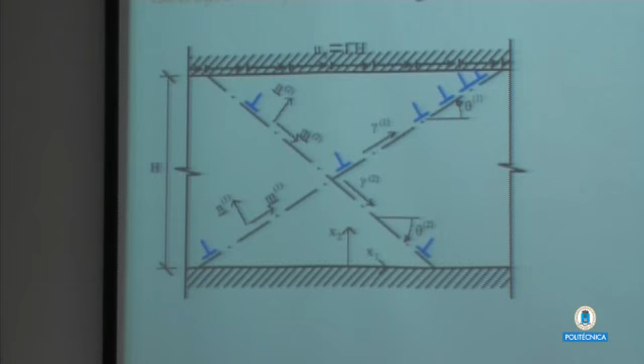Let's start with this benchmark. This is a strip, a single crystal strip. It is compressed between two bodies in which dislocation cannot penetrate, and it is subjected to simple shear.

Here I have put a couple of slip planes, and there are these blue edge dislocations. When you subject the strip to simple shear, these dislocations start moving on this slip plane, and they pile up on the border where they cannot penetrate.

The slip on each glide is gamma, in this two-dimensional case. So these dislocation lines are just piercing this plane.

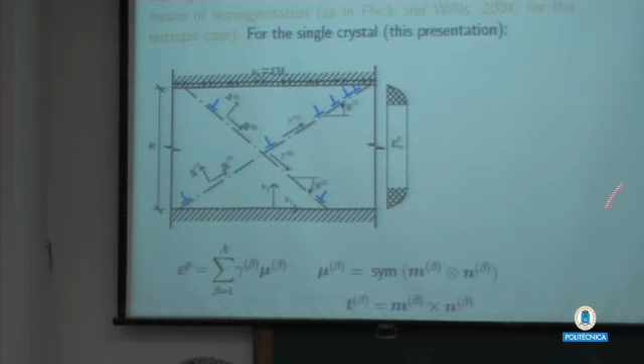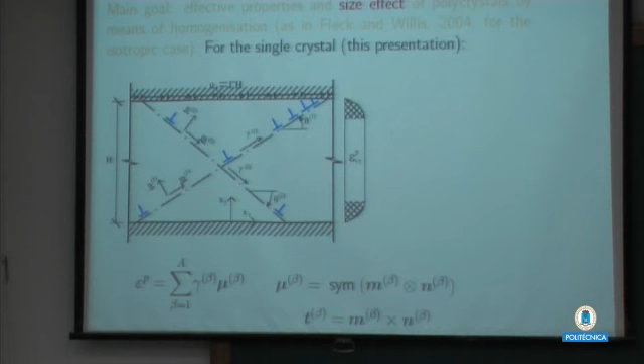Once you have the slip on each glide, you combine them in order to compute the plastic strain. The plastic strain is given as the sum of the slip times this Schmid tensor, which depends on the crystallographic details, the slip direction, and the normal to the slip plane.

Once you compute this plastic strain, you find something like this. The plastic strain has to be zero close to the boundary, because there the dislocations just stop.

The point is that if H is quite big, you don't care about this boundary layer of plastic strain, because it's negligible in comparison to the dimension of the strip.

So standard plasticity works, and you just predict homogeneous plastic strain. Instead, in the size dimension between a few hundred nanometers and a few tens of micrometers, this process zone counts a lot, with the usual 'smaller being stronger' effect.

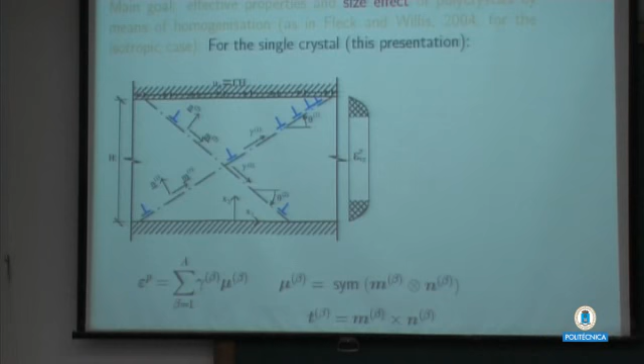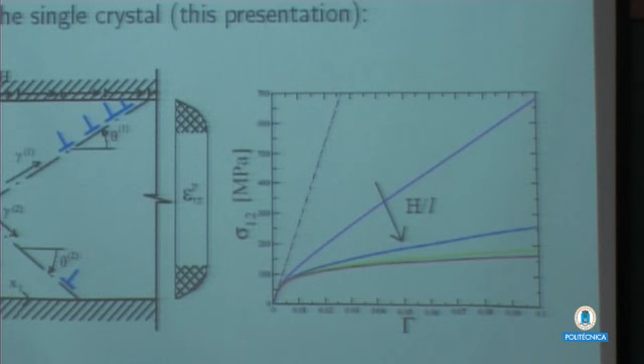This is too sensible. I wish to predict size effects like this one: if I plot the uniform shear stress on the strip against the applied strain, as I go down with this dimension, I see the strain hardening increase. This is one size effect, and it depends on the length scale, which is related to this process zone.

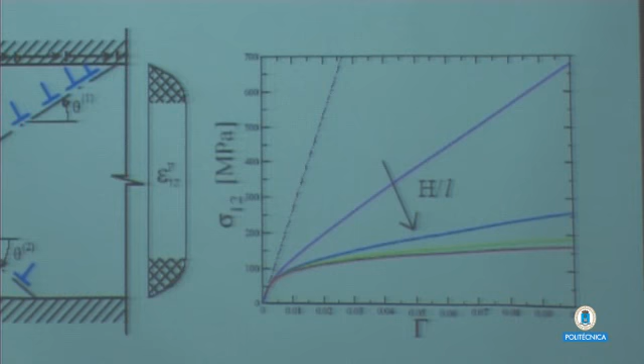So let's imagine we just go down with the dimension and we see this slope of the hardening curve increasing. Another typical size effect is the strengthening. This means it depends on a different mechanism, and when you decrease the size, you see the yield stress increase, with little change in the slope of the stress-strain curve after the yield stress.

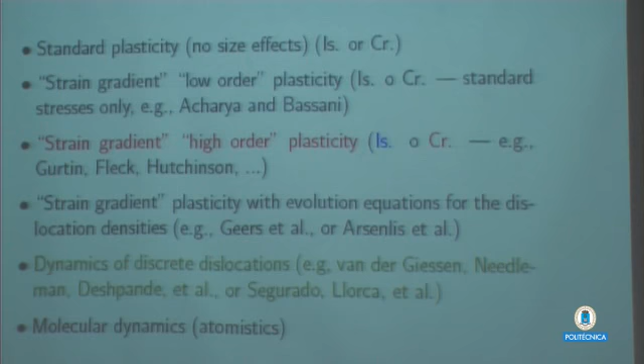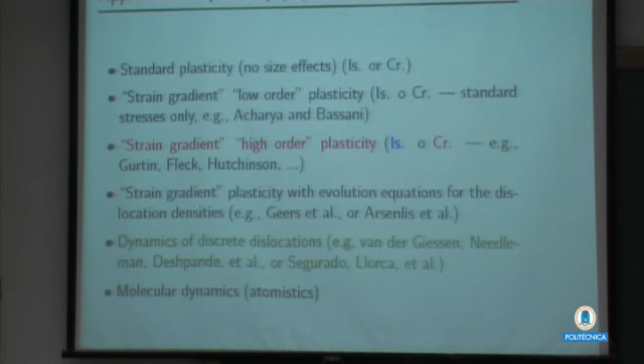More or less, these are some approaches to plasticity. Standard plasticity is not able to reproduce any size effect. Of course, there are no length scales involved in the model, whether isotropic or crystal plasticity.

The first easy approach to try to describe some size effect is the so-called lower-order plasticity. This can also be isotropic or crystal plasticity, but you just put in a rather rude way some dependence on the gradient of the plastic strain, just in the tangential modulus, in order to predict some size effect. There are no higher order stresses or higher order boundary conditions.

Instead, my talk is about higher order strain gradient plasticity. This can be crystal or isotropic. Here we have non-standard boundary conditions, non-standard stresses, and so on. And the basis for this theory...

has been given by well-known scientists, Gurtin, Fleck, Hutchinson, and so on. Then an even more detailed description is strain gradient plasticity, in which you also have an evolution equation for the dislocation densities, which is not the case in the theory I'm talking about. Then there's discrete dislocation dynamics, a much more detailed description, where you abandon the continuum description—this is discrete—and for even more detail you can go to the atomistic level.

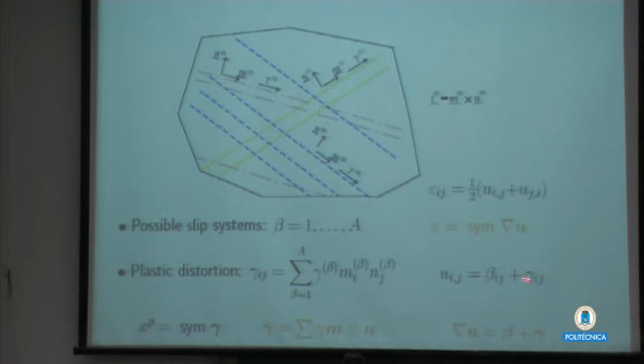Let's go back a little bit to the notation. In this light brown, I copy the equation in symbolic notation instead of index notation. The strain, the total strain, is as usual the symmetric part of the displacement gradient, and this displacement gradient is divided into an elastic part beta and a plastic part, the plastic distortion, obtained by combining the glide, the slip on each system...

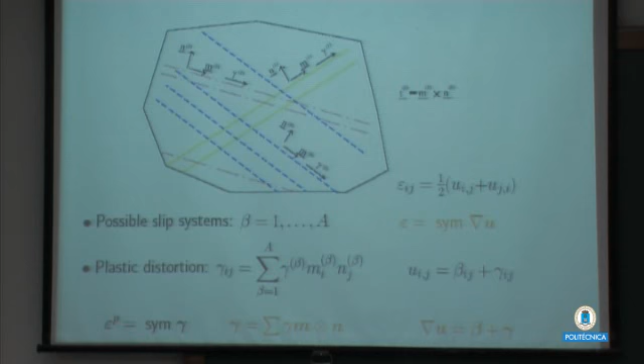with this crystallographic unit tensor. And if you take the symmetric part of the plastic distortion, you have the plastic strain, and this becomes the Schmid symmetric tensor.

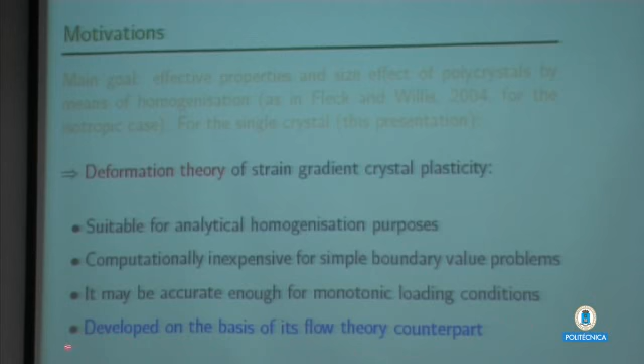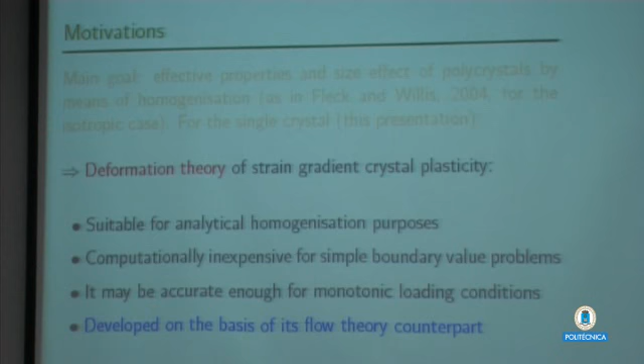I talk about the deformation theory of crystal plasticity, not flow theory, because when I started this work, as I said earlier, my goal was an analytical homogenization, so there was no way to do it with flow theory. Also, deformation theory is quite a mess, but anyway, the first approach was deformation theory because it's much easier to deal with. The most important thing is that this deformation theory is developed on the basis of flow theory, so we always have a parallel with flow theory that we can develop together with the deformation theory.

Before talking about the strain gradient extension, I'd like to say something about the classical deformation theory of crystal plasticity—so no size effect involved, just classical stuff.

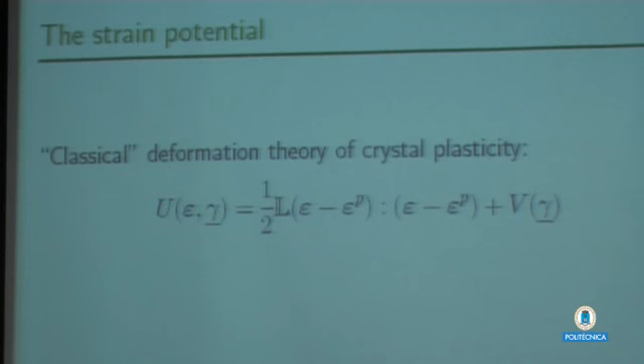You start by defining the strain potential, and in the strain potential there is the linear elastic energy, plus a plastic potential, which is a function of the slip vector, a vector that collects all the available slip systems.

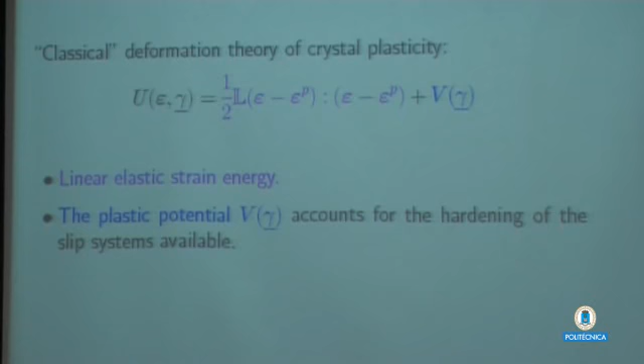The strange thing with respect to what we are usually accustomed to is that we define two independent kinematic variables, but independent just because of the stress conjugation, not because they are physically independent. So we associate a stress, the usual Cauchy stress, to the total strain, and we also associate a new stress to each plastic slip.

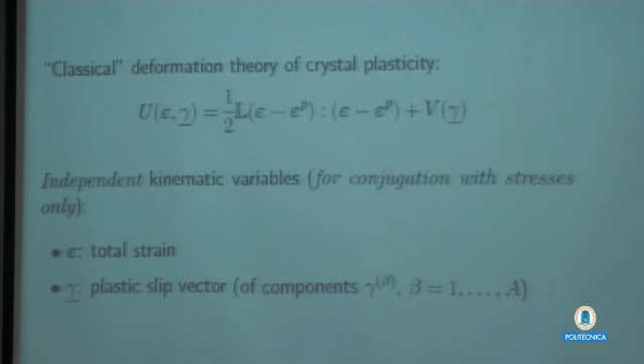This new stress S, with an S for each glide, is conjugated to the plastic slip on that glide, and it turns out to be the difference between this stress H, which is a function of the slip in the model, and tau, which is the resolved stress on the slip system you are considering—so it's the Schmid stress.

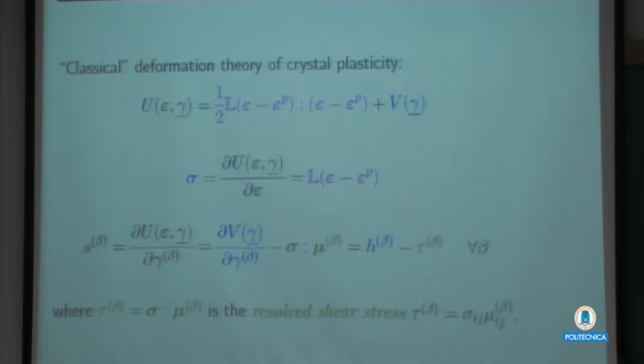Once you put this into the total potential energy, you just look for the minimum, so you write down the stationarity conditions, and what you obtain is the usual divergence of the Cauchy stress equals zero if you don't have body forces.

But you have another equilibrium equation, which is this one: this new stress we have defined is just zero. This means, since it's an equilibrium equation, that we have this equality, which is the usual flow rule—the Schmid, the resolved shear stress, must be equal to some function of the plasticity you have.

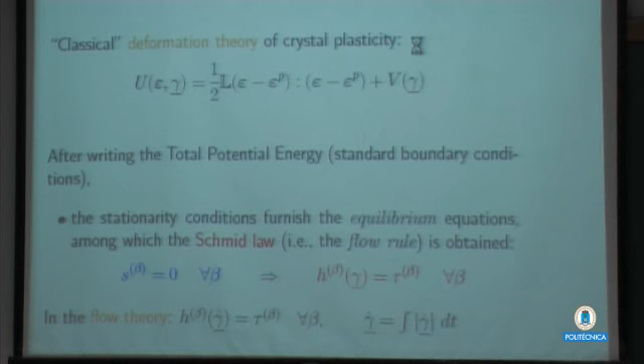In the flow theory case, the definition of this stress is a little different, because it's not in terms of the actual plastic slips, but usually the accumulated plasticity. But the field equations are exactly the same in flow theory or deformation theory if written in terms of stresses—it's just a matter of defining the stresses.

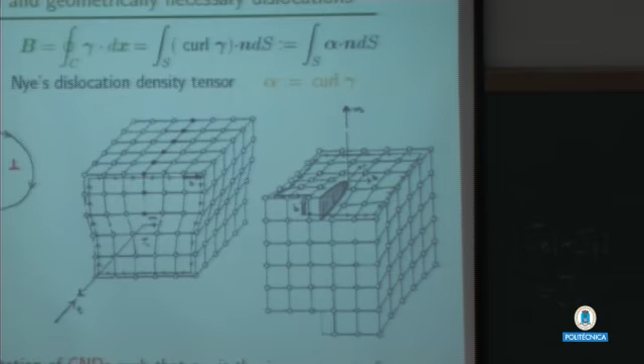Now let's go to the strain gradient extension. First, I'd like to introduce the most important kinematic variable in order to extend the model to the strain gradient case, which is the Nye tensor.

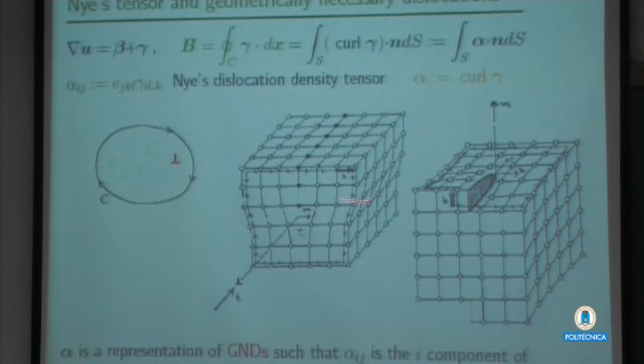What you try to do is copy what dislocations do in a real crystal. So here you have an edge dislocation and a screw dislocation, and this is the usual procedure in order to obtain the Burgers vector due to this dislocation.

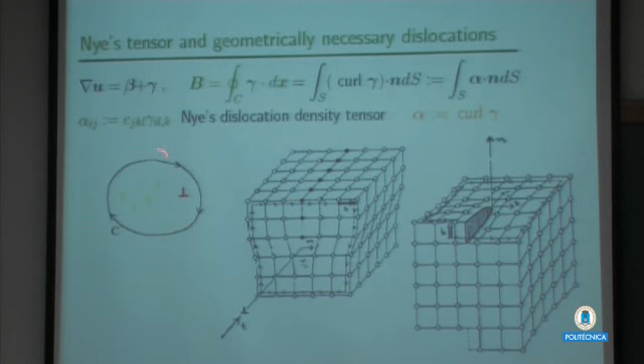If you divide the gradient of the displacement into the elastic and plastic part, you know that the plastic distortion, usually, if you integrate it in a closed line, it doesn't give zero because it's not compatible in general, but it gives a net Burgers vector.

In this picture we have a few edge dislocations, and if you do this operation, all the dislocations with a different sign just compensate, and finally in the Burgers vector you have only the surplus of dislocations of the same sign, so in this case only the red one, and these are the so-called geometrically necessary dislocations.

So then if you apply the Stokes theorem, you pass to the surface integral, and you define the curl of the plastic distortion as the Nye tensor.

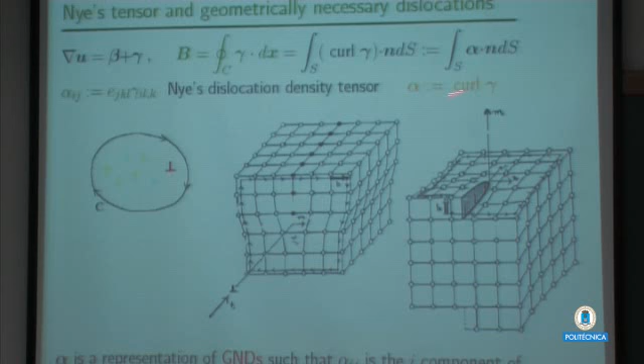The first index in the Nye tensor is related to the net Burgers vector. The second index, this is a second order tensor, is related to the dislocation line direction. You compute this net Burgers vector in this way.

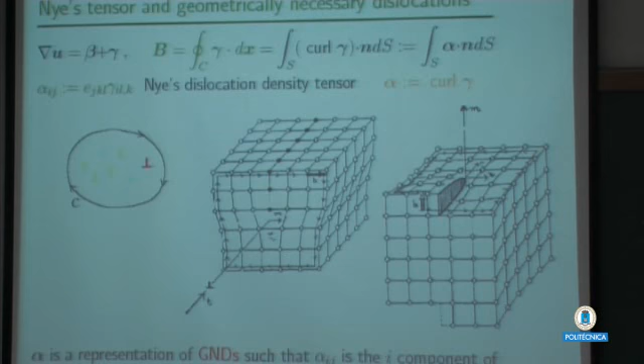So the Nye dislocation density tensor is a representation of GNDs. As I said, the first index is related to the Burgers vector, the second one is related to the direction of the dislocations you are accounting for in doing this integral on the surface S.

We'll skip all these mathematical details, but what I'd like to say is that if you take this definition of the Nye tensor and substitute the definition of plastic distortion, you can write the Nye tensor in terms of slip gradients and some crystallographic details.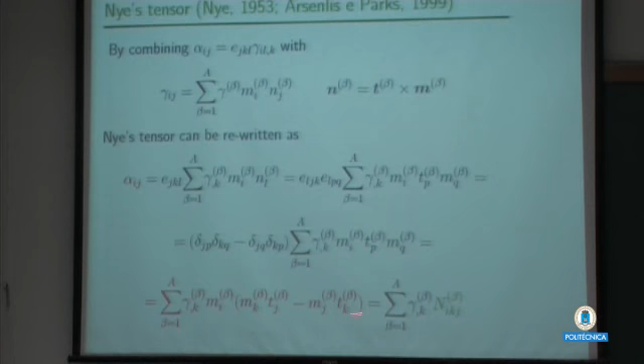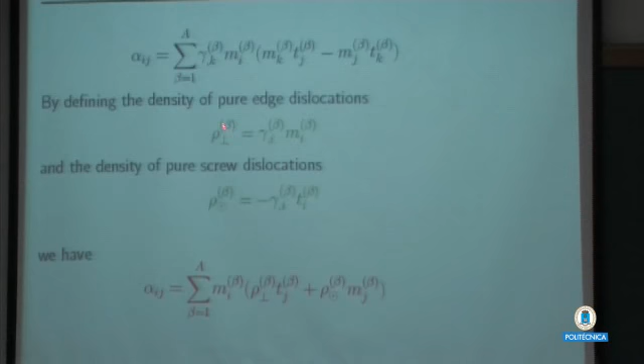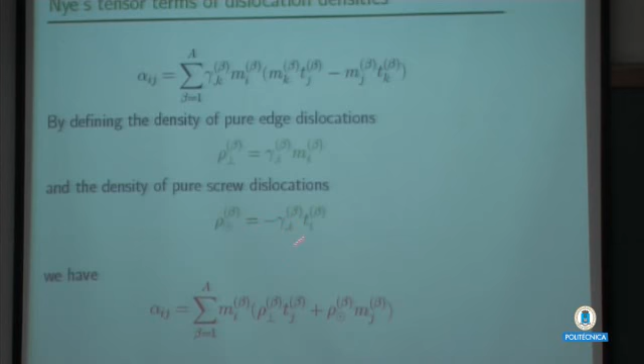These are all the unit vectors that define the crystallography you are considering. The main thing, why we do this, is because we can recognize that the component of the slip gradient on the slip direction is a pure edge dislocation, whereas the component of the slip gradient on the transverse direction in the slip plane is a pure screw dislocation.

Why is this? Let's see. If we consider an edge dislocation, look at the first term of this expression for the Nye tensor. The edge dislocation has a gradient along the slip direction, M. The gradient has to be projected onto this direction, and the Burgers vector is directed as M, as usual. The edge dislocation line is exactly T. So this first term is a kind of representation of a pure edge dislocation.

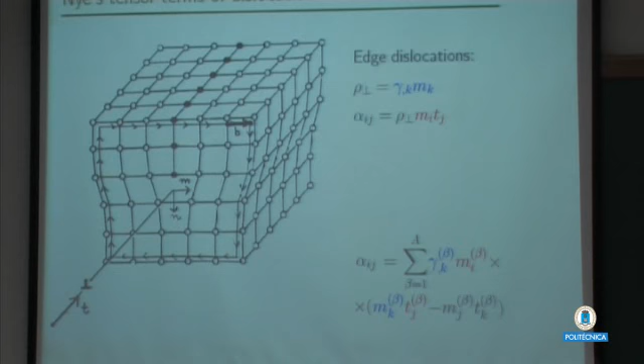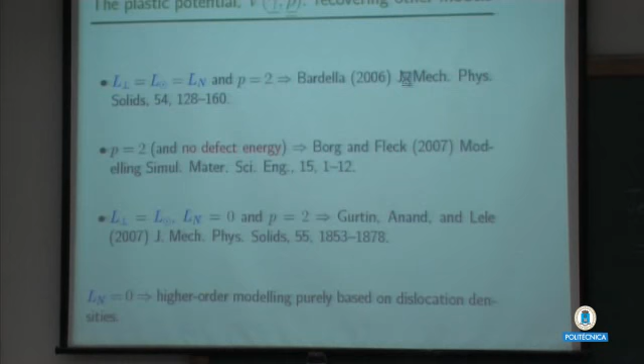The same happens with screw dislocation. In the case of screw dislocation, both the dislocation line and the Burgers vector are directed as M, and the gradient is in the transverse direction.

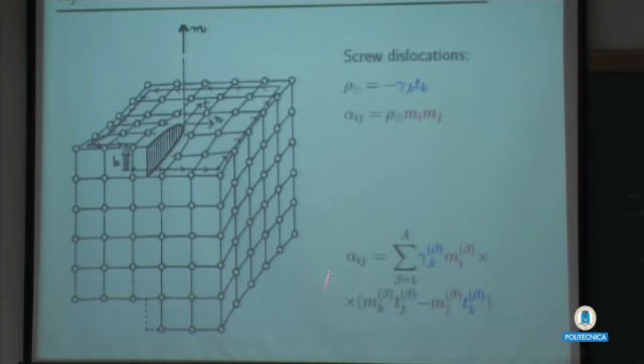So we want to use this Nye tensor in order to extend the model that we have seen earlier. So we take the strain potential and we add a function of the Nye tensor, and we also add something else. We'll see in a second what this is.

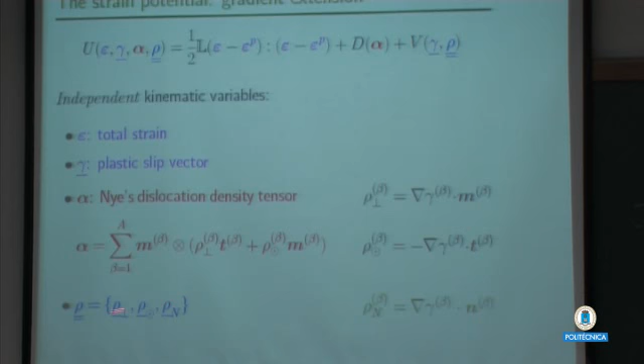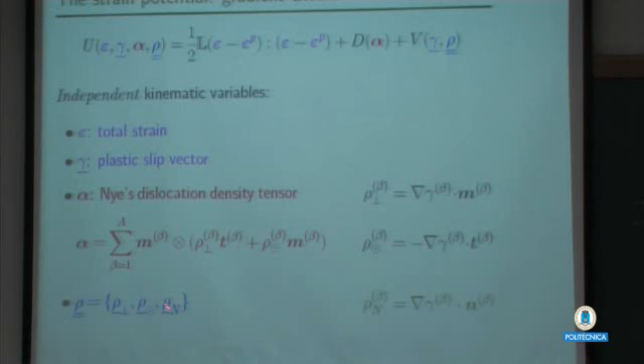So we have the usual standard variables to which we want to conjugate some stresses. We have the Nye dislocation density tensor, and we have this matrix in which we collect all the components of the slip gradient. The first two are dislocation densities, as we have seen. The third one is just an extension of notation, the projection of the slip gradient on the normal to the slip plane. We just want to see how these affect the behavior.

So what is this function? D of alpha is the defect energy. It has been defined earlier by Gurtin, and this is an energetic term. So if you write the flow theory, this is an addition to the free energy, and in the flow theory we still have here the total value of the Nye tensor.

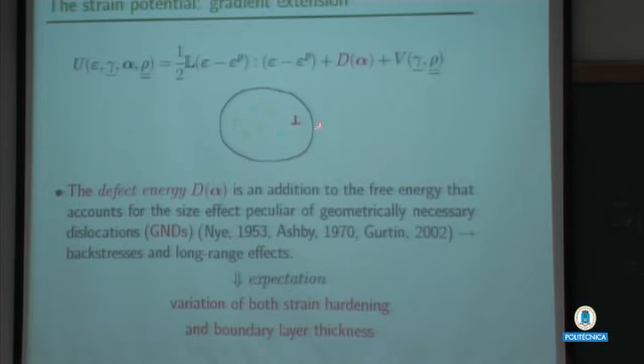What's this for? If you recall this picture, with the defect energy you try to account for the singularity in the Cauchy stress due to the dislocations in your material. This is an energetic term, and since you account only for GNDs, geometrically necessary dislocations, this means that if you are judging the effects of these dislocations, you see only the effect of the red dislocation. The other ones just compensate.

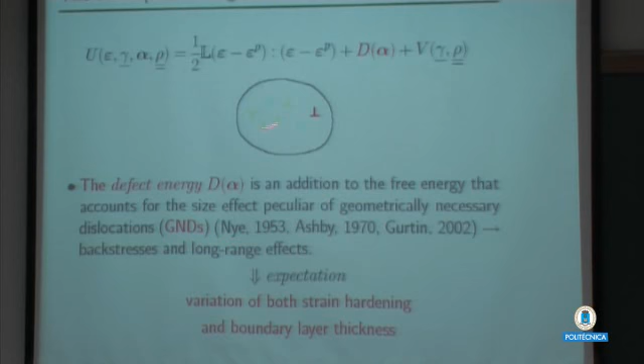This is related to long-range effects. The back stress should be energetic, something like that.

This other term instead tries to account for the dissipation due to dislocation motions, so the whole population of dislocations, and this is completely phenomenological. I wrote dots here because I remember that this part in the flow theory is a dissipative part, so the stresses come from some plastic potential, if you like.

It's better perhaps in the flow theory to call it some hardening function in which the main variables are rate of plastic measures, not total plastic measures. And the expectation is that this could model the strengthening.

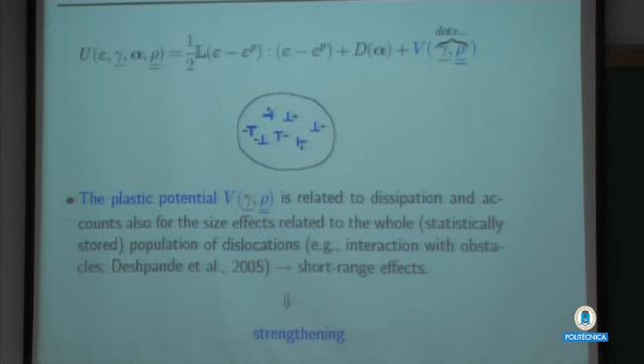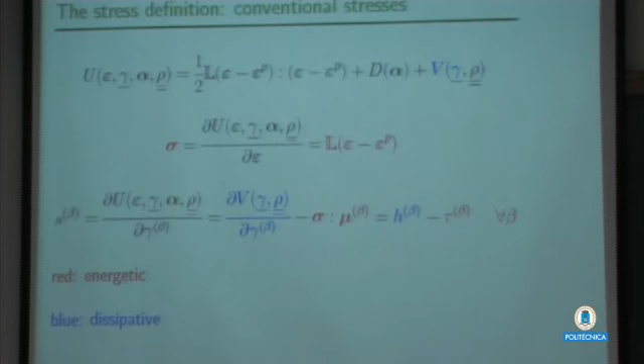So after you have extended the classical theory in this way, you just run the usual technology. You define for each of these independent kinematic variables the stresses. There are the usual two stresses we have seen earlier for the classical theory.

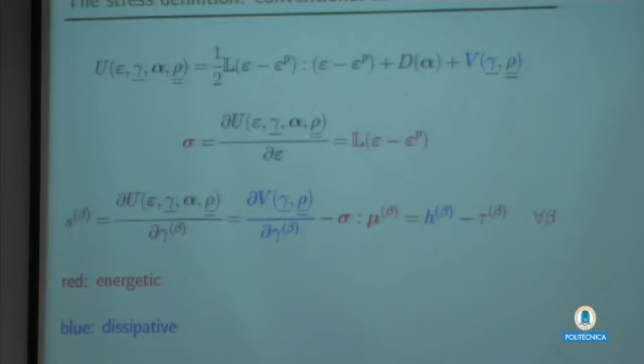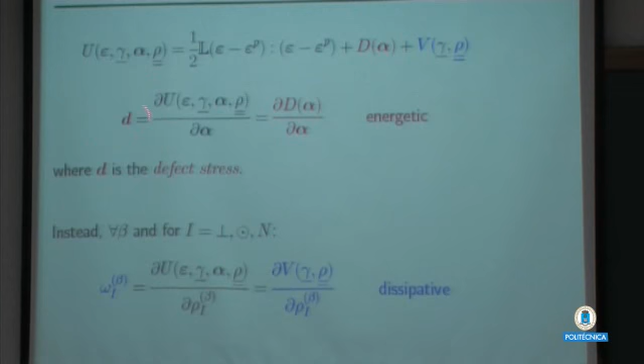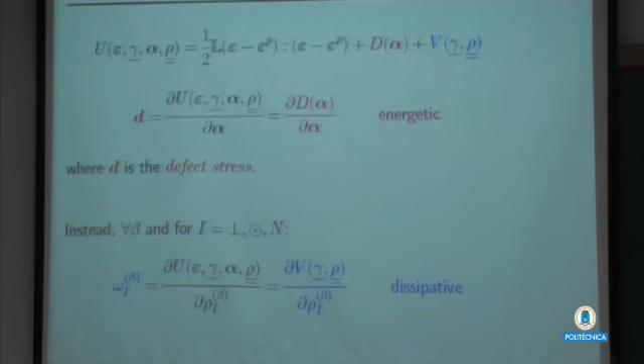And you define also the defect stress, which is dependent on the defect energy, and this has been defined. The transpose of this stress is what Gurtin called the defect stress. And then there are these dissipative stresses, conjugated to all these projections of the plastic slip gradients.

Another non-standard stress that is useful to define is the microstress. In order to define the microstress, you conjugate this stress to the gradient of the plastic slip, in which you also consider the dependence of alpha and rho on the plastic slip. This is useful because it's a combination of the defect stress and the dissipative stresses, and because it comes out in the higher order boundary condition.

So beside the standard boundary conditions, you have these non-standard boundary conditions. You can do something more general, but from the physical viewpoint, we just consider that when this dislocation cannot penetrate the boundary, you set that the plastic slip must be 0. When instead you know that this dislocation can leave the body and make a step, you say that the microstress, this higher order traction due to the microstress, is 0.

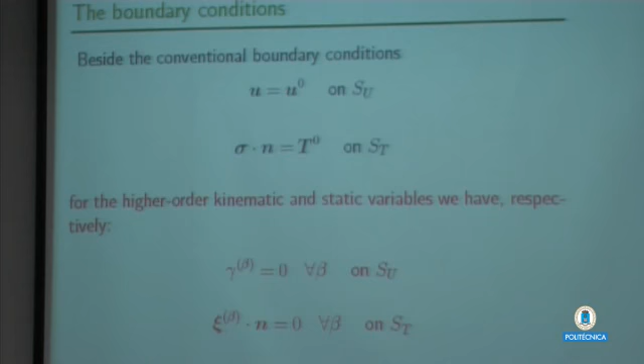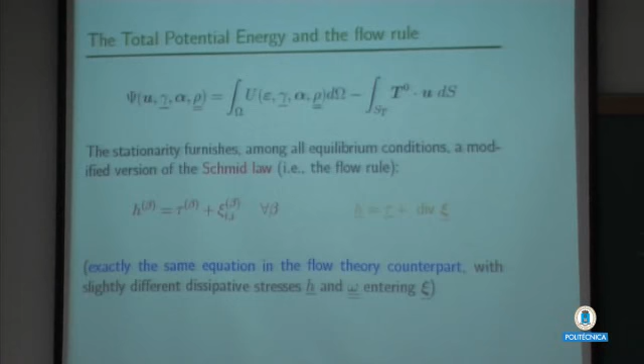Then if you put all this stuff into the total potential energy, you find the minimum, and formally you find the equilibrium equations. With respect to the classical case, we have this term, the divergence of the microstress, which enters the higher order equilibrium equation. So you have the standard divergence of Cauchy stress equals 0, plus this one, which is the modified Schmid law.

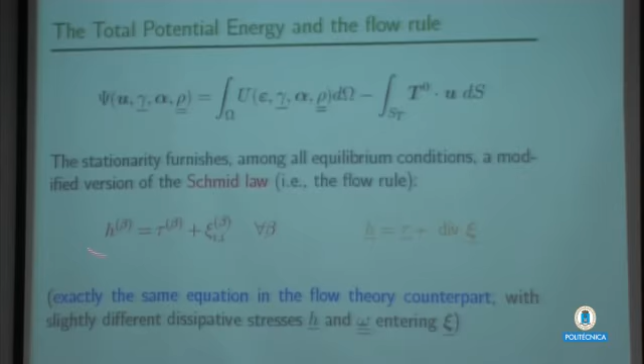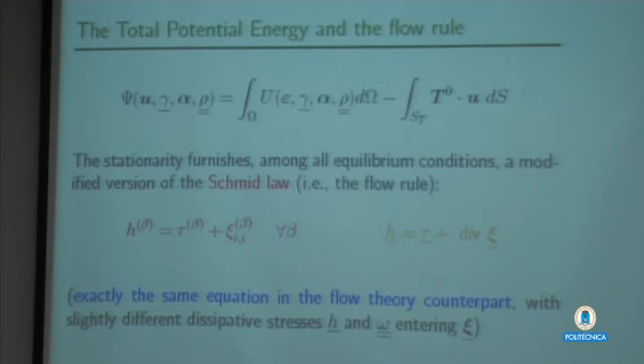Without the microstress, we have the usual stuff. With the microstress, we have this kind of complicated system. If you replace the definition of all the stresses here, you obtain a very complicated partial differential equation system, and here you have the symbolic notation. This is exactly the same in the flow theory counterpart. The only thing that changes is the definition of the stresses, but the structure is exactly the same.

So the great advantage of the total potential energy is that you have a minimum principle if you choose appropriately the plastic potential and the defect energy, and this principle together with its complementary functional allows very easy calculations for simple boundary value problems. You just use Ritz directly without any need to implement the model into finite elements, which is very complicated.

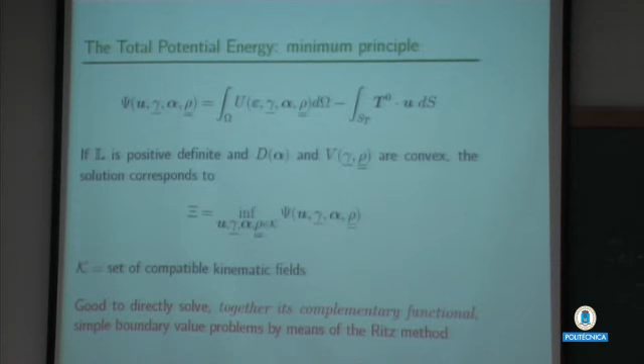So just a very simple choice for the defect energy. This has been earlier proposed by Gurtin, just a quadratic form, very easy. For sure this is convex. And there are many other possibilities. One of them appeared in JMPS in 2007, this homogeneous of degree 1 defect energy.

There are many works. Am I late? No?

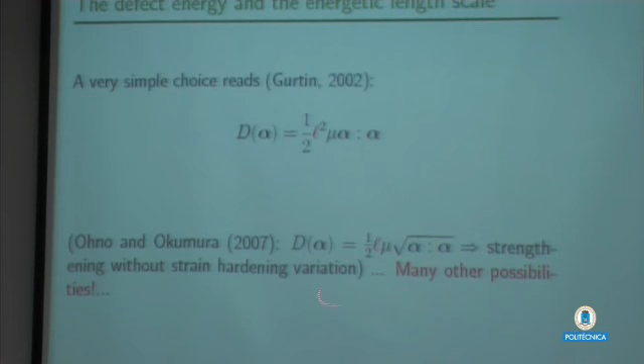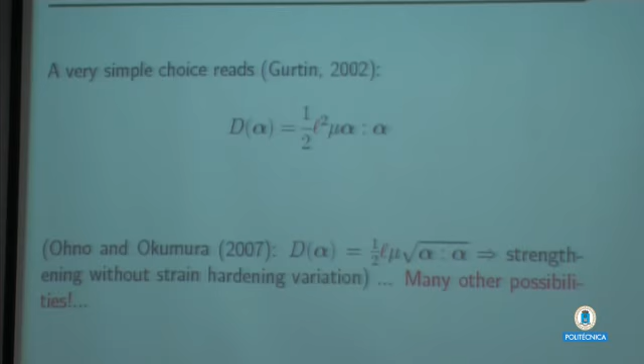There are many works now in which they try to find an appropriate form of the defect energy, and they usually use gamma convergence to make an average among these dislocations. You just choose simple problems. I think one of the most important ways to make this model better is just to understand which should be the best form for the defect energy, which is not easy at all. I hope that our collaboration with discrete dislocation simulations will help us understand something more about this.

The plastic potential is even worse because it's completely phenomenological. And here I have tried a kind of complicated extension. Oh sorry, I haven't said an important thing: of course once you define the defect energy, because of dimensional consistency, you've got to put some length scale.

Mu is the shear modulus. Since alpha has the dimension of 1 over a length, to have an energy density you've got to put a length scale. This length scale, if things work, should be more or less the dimension of the boundary layer of plastic strains where dislocations pile up, or something like that. So in that case, I have defined the defect energy in such a way as to have just one length scale.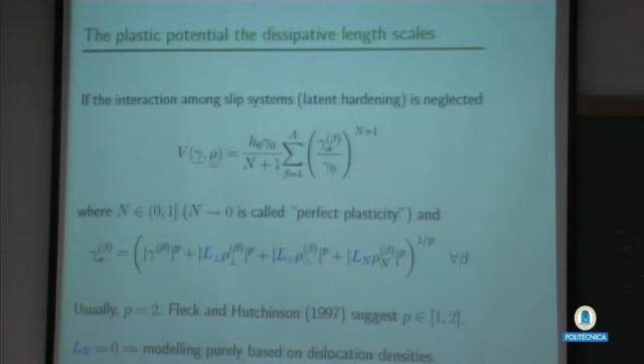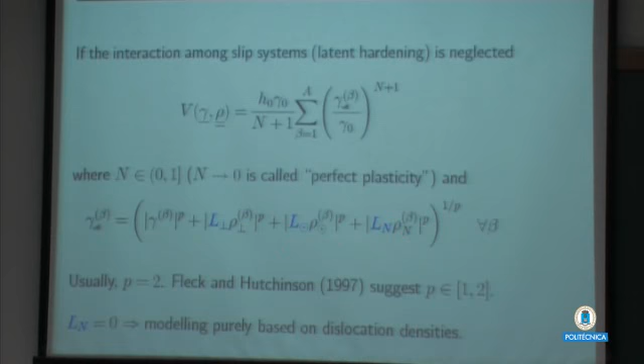The plastic potential instead is much more complicated, and this is due to the fact that it's completely phenomenological. It's just a rough extension of the standard Mises plasticity for crystals. So you take this power law, which is standard in the deformation theory context, and we try to see how each of the projections of the slip gradient affects the description of size effects, by defining one different length scale for each of these projections.

Usually P is equal to 2, but in my opinion there are no strong arguments to say P should be equal to 2, besides that it's much better for analysis. I tried different values of P, and finally I concluded 2 is good, because otherwise it's a lot of complication for earning almost nothing in the description capability.

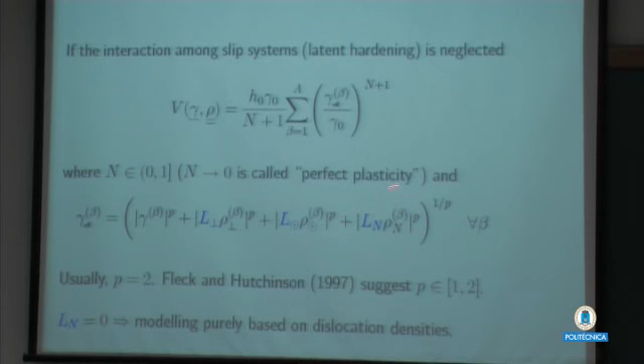The interesting thing is that if you choose this length scale equal to 0, you have a model which is just dependent on dislocation densities, which is good from the physical viewpoint, because the defect energy through the Nye tensor is just dependent on dislocation densities.

I'd like also to say that here we have neglected latent hardening. You can add it, but it's even more complicated. In this model we have an interaction which is natural, and I like it a lot, among different slip systems, due to the fact that this defect energy through the Nye tensor couples all the dislocation densities on various slip systems.

Let's go back to the simple shear benchmark. I have run a lot of analysis with different crystallographies to see how it works. So we have B couples of symmetrically oriented slip systems, meaning that if I have this one, I also have that one at each material point.

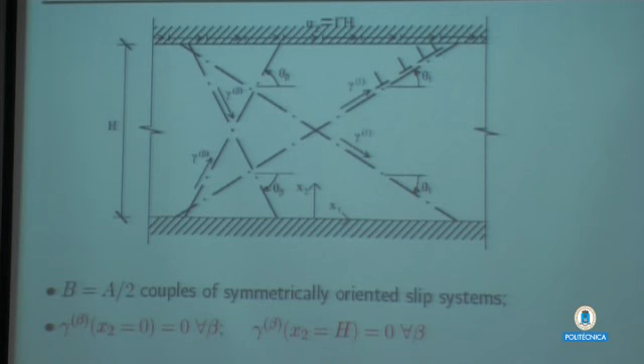In order to trigger inhomogeneities, which is fundamental to have a gradient and to see a size effect, we must say that on these borders dislocations cannot penetrate. So our higher order, non-standard boundary condition is just to fix zero plastic slip up and down.

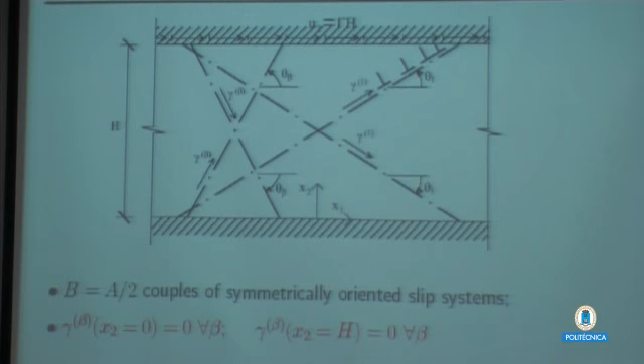For instance, here we look just at the effect of the energetic length scale, the Nye tensor, which should rule the thickness of the boundary layer of plastic strain. So I plot the plastic strain against the normalized coordinate - this is the middle of the strip, and this is the border.

Here there are two cases of the exponential parameter in the power law: the so-called perfect plasticity case, which isn't actually perfect plasticity because there is the gradient term, so you don't have a plateau; and the linear case, which is the maximum value one could put for n.

You see, if you change the dimension and keep L fixed, for each value of this small r, which is this ratio, you have a completely different thickness of the boundary layers. So it changes a lot.

Instead, if you keep this ratio constant and look at the effect of dissipative length scales, all taken the same value, you see that you change this ratio and nothing changes for the boundary thickness, which is very good because that's what this model is built for.

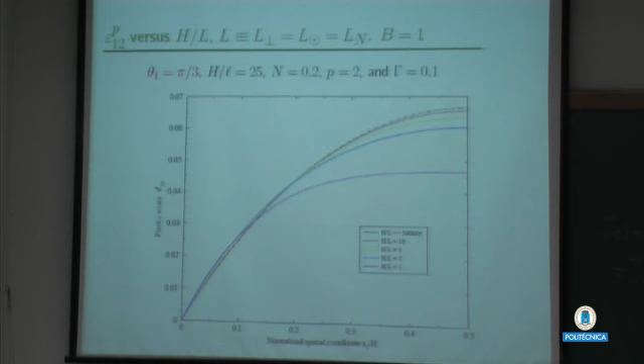We're not going to look at all these curves in detail, but the point is that all these examples are for just one couple of symmetric slip systems, and this is fundamental, unfortunately, because things don't work so well if you change the crystallography, if you have more slip systems. This is the main result of all these simulations I've done.

For one couple of slip systems, if you neglect the dissipative strain gradient extension, it works exactly as we wanted. You change this ratio and you see a variation of strain hardening without almost any change in the yield stress.

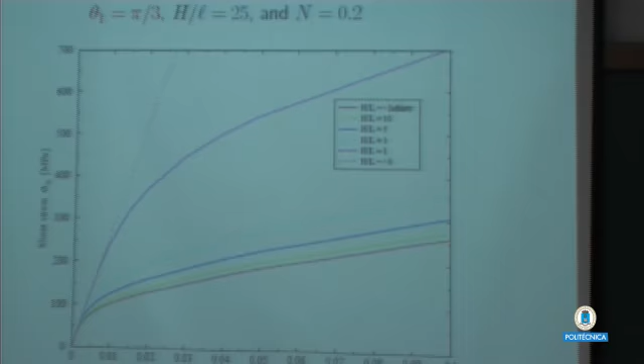On the contrary, if you keep the energetic length scale fixed and change the dissipative length scale, you have a strengthening, but the variation of strain hardening is almost nothing. So everything seems to work.

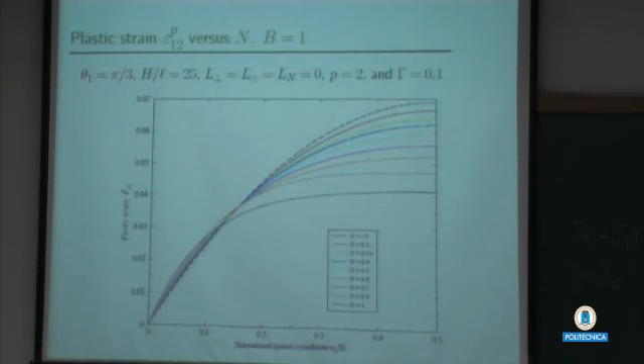So I'll show you some other plots. For instance, let's take this one.

In this case, we have two symmetric couples of slip systems, okay, with B equal to 2. And you see, things don't work. This is n equals 0.2, which is kind of realistic, almost small, so it's almost the perfect plasticity case.

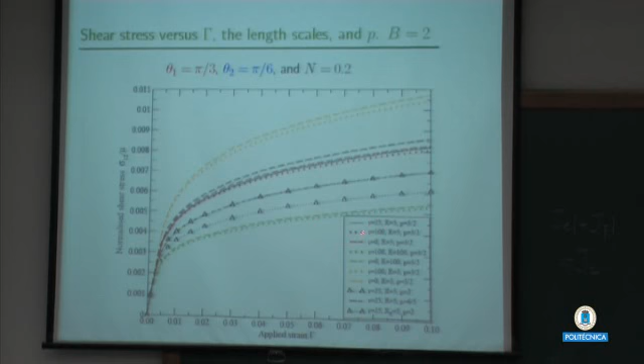In the previous plots, P was always equal to 2. Here I try different parameters and different combinations. The only thing I'd like to tell you is that you change the energetic length scales a lot, and unfortunately the strain hardening doesn't change almost at all.

It's always strengthening. So the point is, if you want to have this size effect, the strengthening is always there whether or not you put some dissipative extension. The point is, in my opinion, trying to understand how we can have some piece of the model that can always be related to strain hardening variation - and that doesn't seem to be very easy.

I'll finish by trying to explain this plot, which I like a lot when I found it. It took me a while to understand why I had these results, so when I could understand it, I was happy. This is the comparison between two different crystallographies.

B equal 1 is just a 60 degrees inclined couple of this slip system. B equal 2 is this one plus a 45 degrees inclined slip system. The point is that on the 45 degrees inclined slip system, the Schmid stress is 0 under this condition, because the Schmid factor is 0.

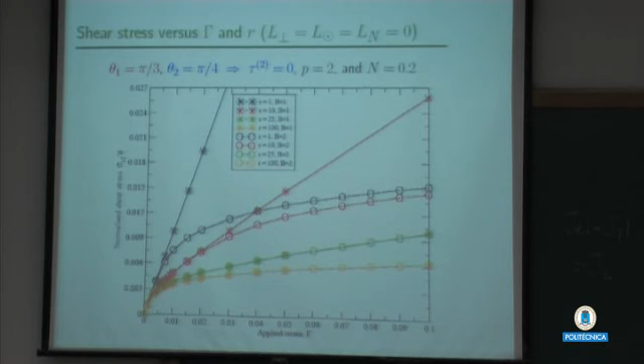So I would expect that nothing should change if I add this slip system. And in fact, if you have not too small a strip, you see the curves coincide for the two crystallographies. But once you go down in dimension, what happens is the coupling in the defect energy that I told you about earlier.

And the higher order equation couples all the dislocation densities through the Nye tensor. So it happens that in the higher order equilibrium equation on the 45 inclined slip system, you have a term due to the dislocations on the other slips. So what happens is that due to this defect stress, some dislocations start moving also on the 45 inclined slip system.

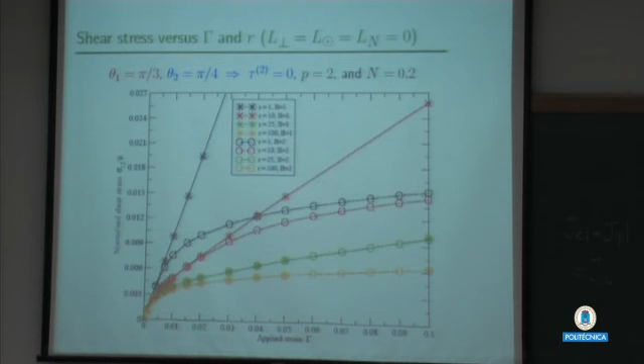And this is good because this is what Javier could model with his discrete dislocation plasticity, because the inhomogeneities of his Cauchy stress can, sooner or later, trigger some dislocation moving on this 45 degrees inclined slip system.

So I go back to the conclusion. The conclusion was that for what concerns the plastic potential, this is the main variable entering the plastic potential. I think it's wise to take P equal to 2 - this P norm should be the easiest one. And probably it's also a good idea to throw this term away so that we have a model just dependent on dislocation densities.

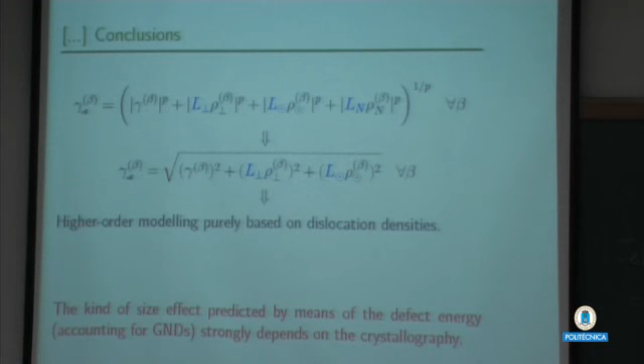And the main point, as I already said, is that the size effect due to the defect energy is difficult to predict. We don't know whether it is strengthening, strain hardening, or whatever.

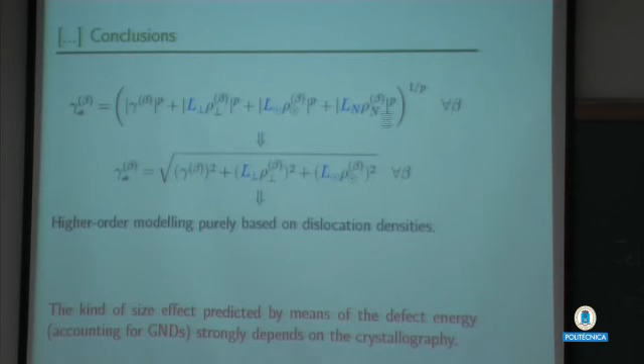There are a lot of open issues. We should find the appropriate form for this plastic potential which extends the classical theory. And one interesting issue to me is the understanding of the higher order boundary conditions at the internal grain boundaries in a polycrystal.

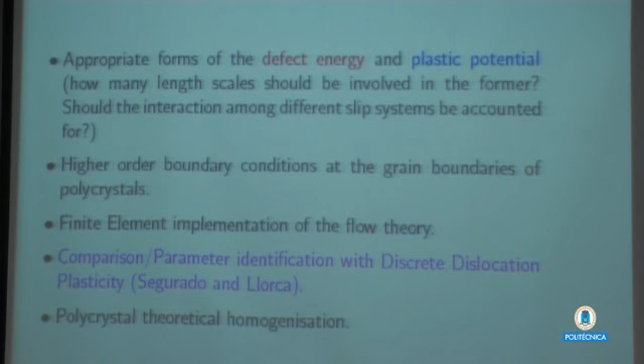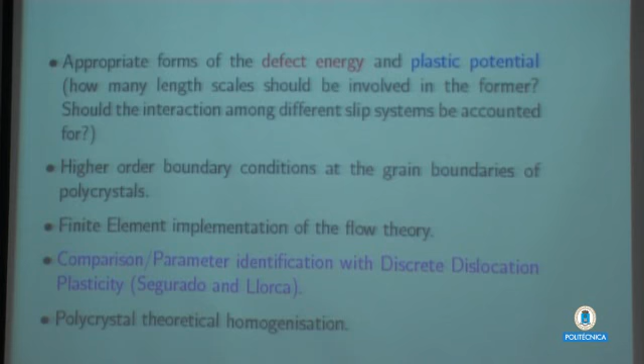Of course, I should sooner or later implement this model, within our project, into finite elements, so that we could compare, for general boundary value problems, this model with the dislocation dynamics technique, and then sooner or later perhaps homogenize polycrystals. But I hope - thank you very much, that's it.

So, if somebody wants to ask something, we have time enough. It was a very nice talk, very clear, extremely clear. I really appreciate it, thank you very much.

A question: could you implement other boundary conditions, just in the simple strip we are dealing with, in which the dislocations can partially leave the boundary? Yes, yes. The mathematics says you just have to put a value for the plastic slips where you have a kinematic condition, or put a value of the higher order traction where you have a static higher order boundary condition.

A very recent work of Castrense Polizzotto, an Italian from Palermo - I like him because he is almost 80 and he keeps working and publishing, it's unbelievable. Anyway...

He runs some analysis similar to this one, but on the top of the strip he has an interface, so you can play with the boundary condition and see. Also on the boundary condition you can put some energetic effect, some dissipative effect, so you can play with dislocations that can be absorbed into the grain boundary, or that can sooner or later promote the pile-up of dislocations on the other body.